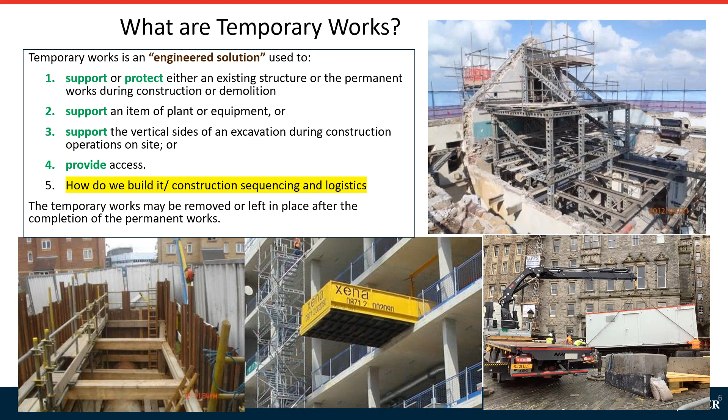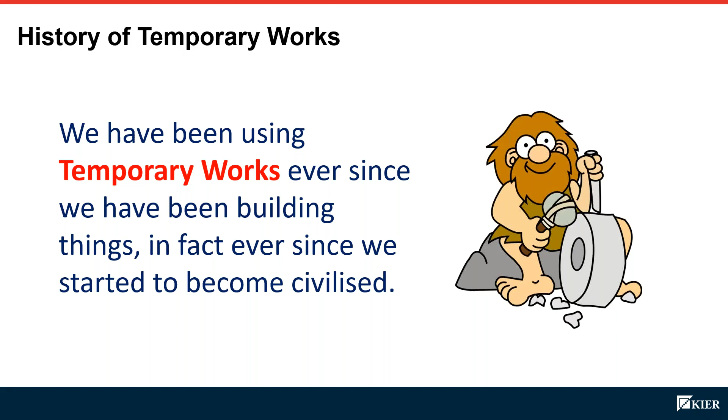And temporary works may be removed or left in place after the completion of the permanent works. So, like Ben said earlier, everything is temporary works when you think about it. And if we delve back in history, we'll see that we've been using temporary works since the dawn of time, ever since we became civilized. The ancient peoples were using it to move big chunks of stone about, so creating pyramids, or in this case, Stonehenge.

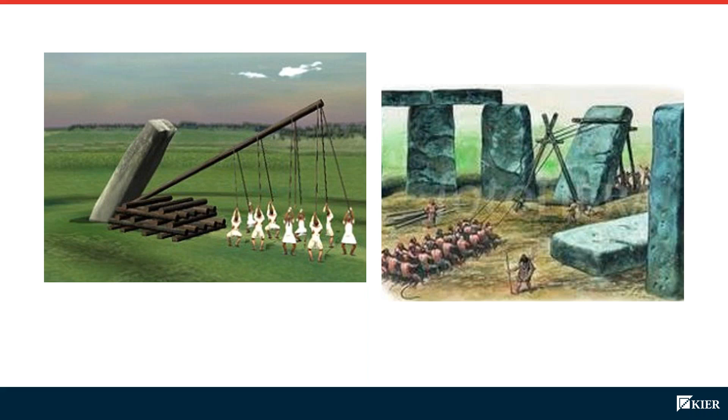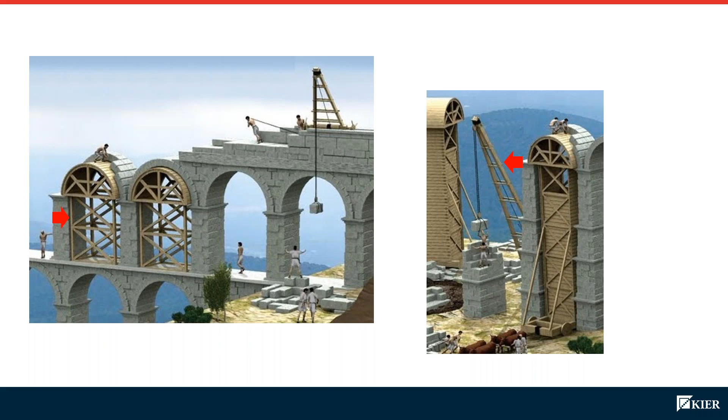The temporary works in this case would be the pulley system that we use to position stones. The ancient Romans were using them to build viaducts, and here you can see a sort of false work and a pulley system for moving blocks about.

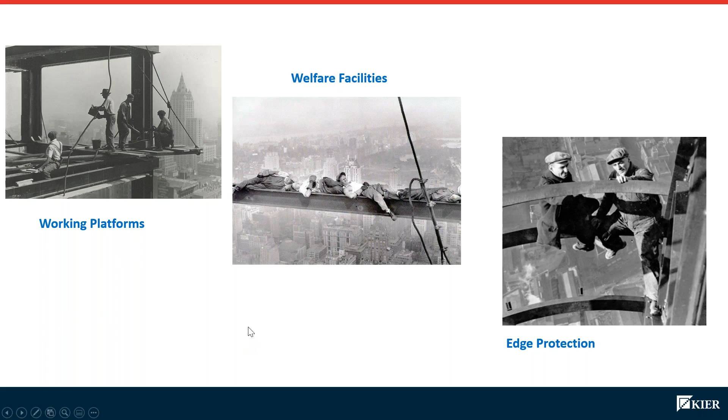They were using it in the Roaring Twenties when they were building skyscrapers, though looking at their working platforms doesn't quite look as safe as it is to modern standards. The welfare facilities definitely look a lot different. And was there even edge protection at that time?

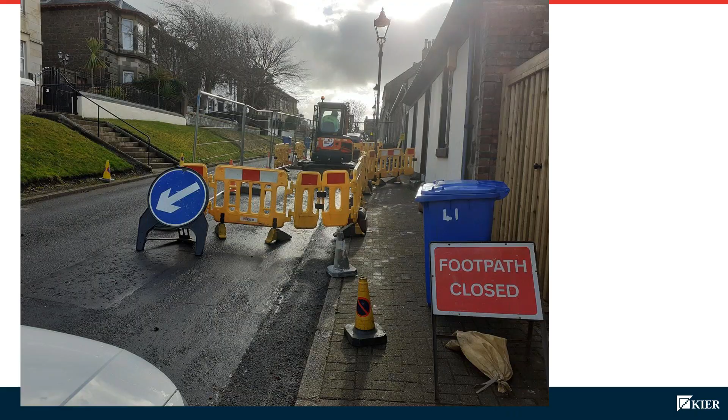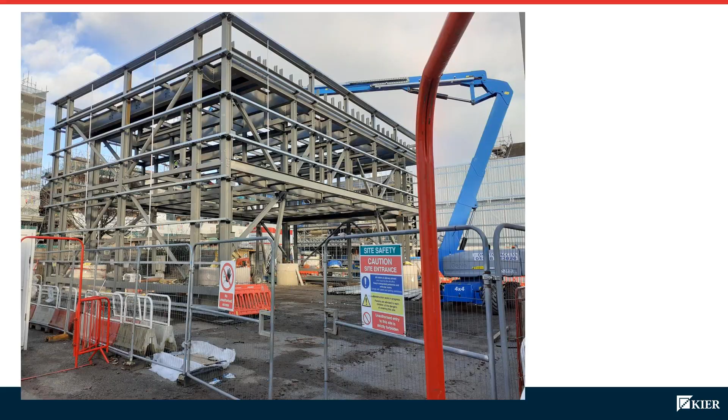Then if you look here, this was an example in Glasgow where this big steel structure was getting lifted onto the roof of a building, which is the Citizens Theatre in the middle of Glasgow. We've got a crane, and the three items for this lift that we need to consider is what's the crane sitting on?

Do we need mats or anything underneath it? How are we attaching the crane to the item we want to lift? And where are we landing it? Is it going to be stable when we move it and when we position it?

If you think about it, it's exactly the same as installing a site cabin in the middle of Edinburgh. So you've got your crane, which in this case is a HIAB. We have to check what it's sitting on. In this case, it's outrigger mats, which you can see at the bottom here.

How are we attaching it to the cabin? We've got some chains and we've got lifting eye points. And then where are we positioning it? We've got big concrete blocks because it's on a slope, which you can't really see in the photo. And we have to check that whole operation.

Now, if you consider risk profile, the picture before, I would say that is very obviously a very high risk item, especially if you notice there's a railway right next to it. Here, it's also quite risky because it's in an environment where there's a lot of public about - right next to where they're working is people going to the Edinburgh Fringe Festival, for example. So there's a different kind of risk we need to consider, which is members of the public.

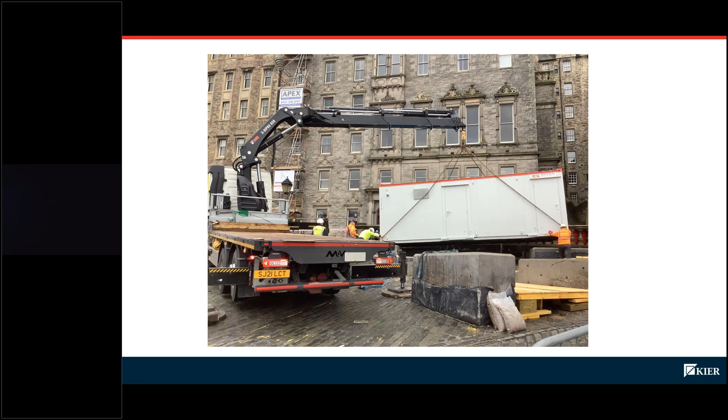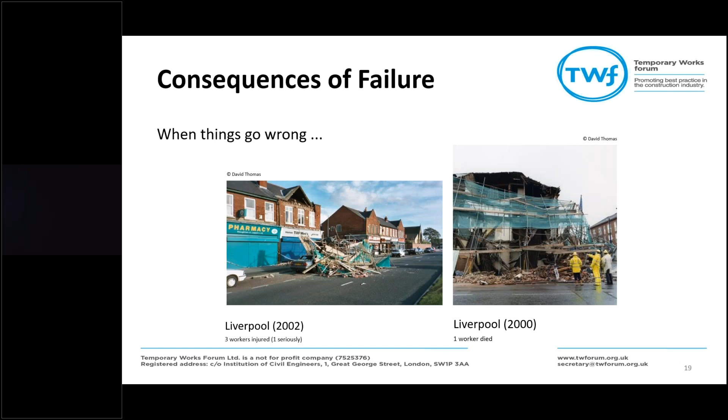So to control all of that, you've got the temporary works procedures and British standards. Back in the 1960s and 70s, there were a lot of incidents where they recognised formwork and falsework collapse, scaffolding collapse. So the government put together the Bragg report, which looked into what was causing all of this. It was published in the 70s, and it was realised that we need one conscious mind on site controlling temporary works - they created the concept of temporary works, which is what we mentioned earlier, and the need for something or a mechanism to control it.

They produced the Code of Practice for Temporary Works and Procedures and the Permissible Stress Design of Falsework. It started off as a false work guide, and now it's evolved over the years into the temporary works procedure, which all companies that I've worked for have based their temporary works procedure on.

The flow of this is that you identify what temporary works you've got on site, and for each temporary works item you create a design for it, you check that design, you control it on site using a permit to load and permit to unload system, and at the heart of it is someone called a Temporary Works Coordinator.

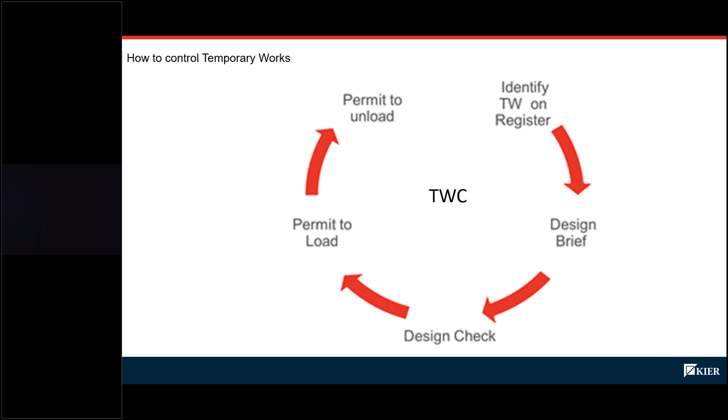So in each business, you have someone called a designated individual, and they are appointed to manage temporary works for your organisation. They're usually like a board director or someone high up who can affect policy and procedure in your company.

They have people called Temporary Works Supervisors, which are there to help support the Temporary Works Coordinator. They might be specialists in whatever temporary works item you're doing, so formwork specialist, scaffolding specialist for example, and they can look at what you're building and make sure it's built correctly as it's being constructed.

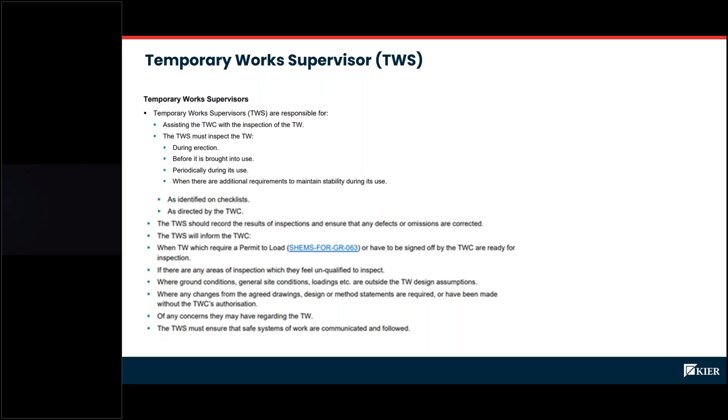And then we have Temporary Works Advisors, which is my role, and we go around carrying out audits to benchmark against our procedures. We develop and deliver training packs to our teams. We offer assistance and guidance and point people in the right direction on where to find things. And we also deliver CITB accredited Temporary Works Coordinator courses to deliver that training.

So some things to consider depending on what organisation you work for. If you're a client, you need to identify temporary works in your bid stages and encourage your designers to eliminate the need for temporary works where you can.

If you're a designer, a permanent works designer, identify and consider how on earth is my team going to build this, and try and eliminate the need for temporary works in the permanent works design.

And if you are a main contractor, a principal contractor, or a subcontractor, you need to look at temporary works at the bidding stage. Now, Ben mentioned just before we came on this call how in one of the tenders no one had actually looked at temporary works as part of it, and they hadn't budgeted for that, and that can lead to extra costs for the companies involved.

That can also lead to mistakes happening, or you carrying out the construction sequence in a way that is not as efficient as it could have been if you had considered temporary works earlier in the process.

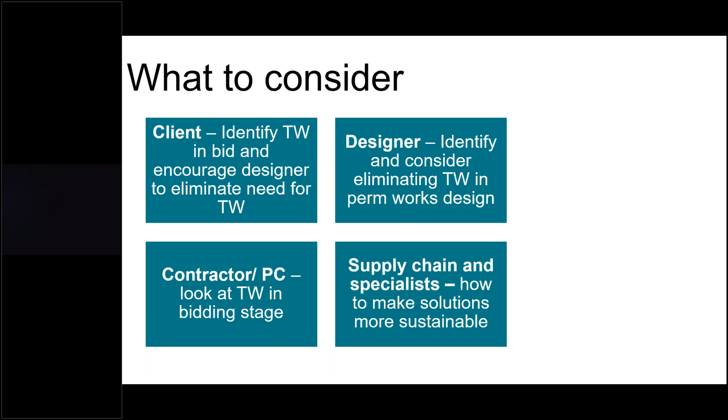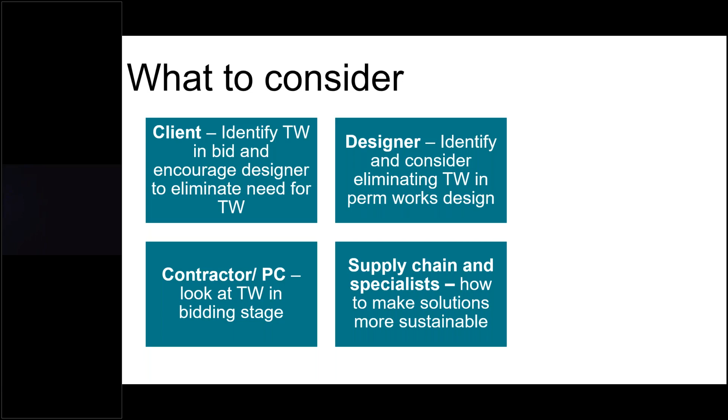And then if you're a supply chain or a specialist within the industry, your role is to make sure the solutions that you come up with fit in with what the contractors and the designers are doing, and to offer technical advice on how to carry out the temporary works that you're providing safely.

You start off with identifying what temporary works you need, appointing the temporary works coordinator. They assess the risk, record that risk, and then carry out designs and design checks and all the permit to work systems depending on what risk they deem the temporary works to be.

So a simplified version is that we identify the temporary works on a register. The temporary works coordinator pulls all the information together onto a design brief. They send that to the designer. The designer designs the item, they get it checked, they bring it back to the temporary works coordinator, they go, yep, that's the design and he did this, we're happy that's going to work, or it's not, and they ask more questions. It then goes to the construction teams.

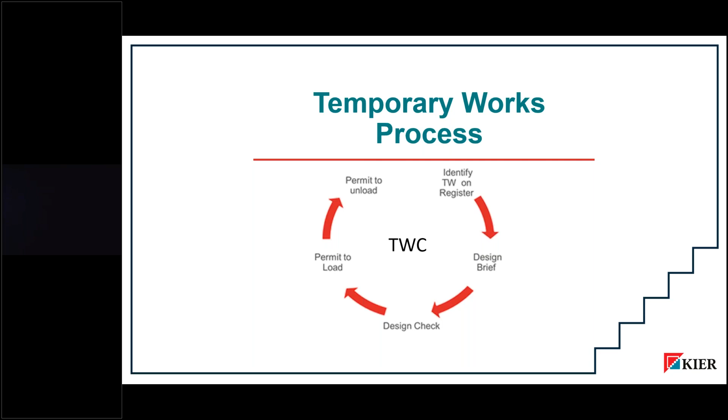When they're happy with it, they start building it, and they issue a permit to load to say that it's built as per the design, and they use the permit to load process as hold points of where we need to identify what's needed, or a check that needs to be carried out before you go into the next step of your temporary works sequence. So if we look at the first part, which is appointing a temporary works coordinator and identifying what temporary works you need.

So the best thing is that the Temporary Works Coordinator has the relevant experience and knowledge to carry out that temporary work. So if all they've been doing is putting up hoardings and they don't know anything about scaffolding, maybe they're not the right Temporary Works Coordinator to deal with a project full of scaffolding.

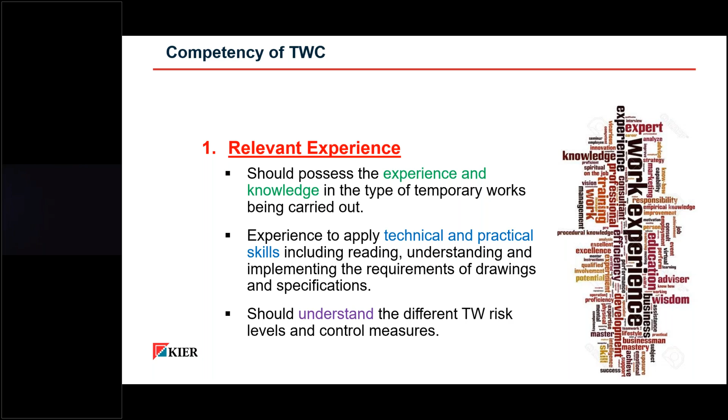Their experience needs to be technical and practical. So it'd be great if they were a chartered civil engineer, for example. In our system, if we've got a high risk project with 6 or more high risk activities, we would prefer a person to be a chartered civil engineer with the experience and knowledge to carry out that work.

If it's a building, for example, generally you don't get civil engineers working in buildings. It's usually a construction engineer or a construction management degree person who is a site manager or a project manager. So they're really expecting them to have extensive site experience and the suitable site experience of carrying out that work before.

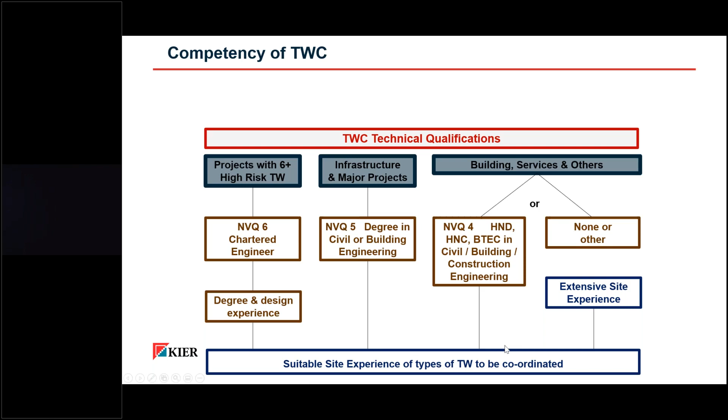The bare minimum requirement is that they've done a Temporary Works Coordinator course, so they understand the control process involved and their duties. It's not just a case of putting them on a course for 2 days and that's it, they're a Temporary Works Coordinator. They need to be mentored and looked after, because it's a lot of responsibility to become a Temporary Works Coordinator.

Not only are you responsible for programme and technical information, you're potentially responsible for the risk to site and people's health, the risk of damage to property, to people, and anything else involved with it. You are the controller of all the information, and if anything goes wrong, the first thing that the Health and Safety Executive or equivalent will look at is what did the Temporary Works Coordinator do to control this.

As mentioned earlier, the Temporary Works Register is the document we use to write down all the temporary works on site, to evaluate the risk profile - whether it's high, medium or low - and then use this document to track where we are along the construction or design process. You've got your design briefs, your drawings, your design check certificates, etc.

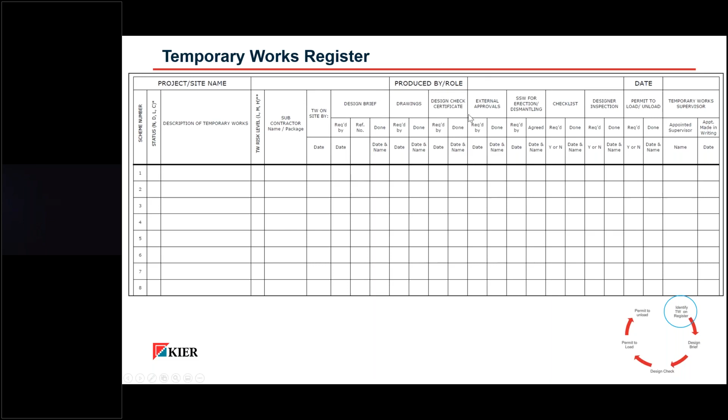So looking at the next bit, which is assessment of risk - since I'm speaking to the risk people, this is the bit you're probably most going to benefit from or know more about. Just like when you do a risk assessment method statement, you're assessing the risk profile of what you do.

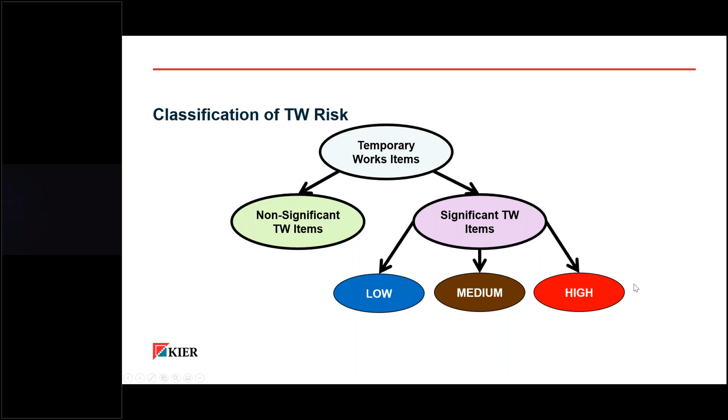In Temporary Works, it's just the same. You start off by asking: is it a non-significant Temporary Works item, or is it a significant Temporary Works item? If it's significant, it needs to be put on the register as low, medium, or high risk. Significant items of Temporary Works are those identified in Figure 1, which is some tables I'm going to show you. These list out the items - they're non-exhaustive, and items not identified may also be considered as part of that.

For non-significant items of Temporary Works, these are the ones that fall below the low risk category level. They have little or no design input. These items do not need to be included in the Temporary Works Control Register, as they may be subject to the same standards of safe working practices as other operations. So non-significant items may include aluminium mobile access towers erected to manufacturer's recommendations - the manufacturer has designed this, and we don't need to check that design as part of the process, we just need to know how to implement it correctly.

Ground level slab edge shutters that are 300 mil deep, and shallow excavations that are less than 600 mil deep.

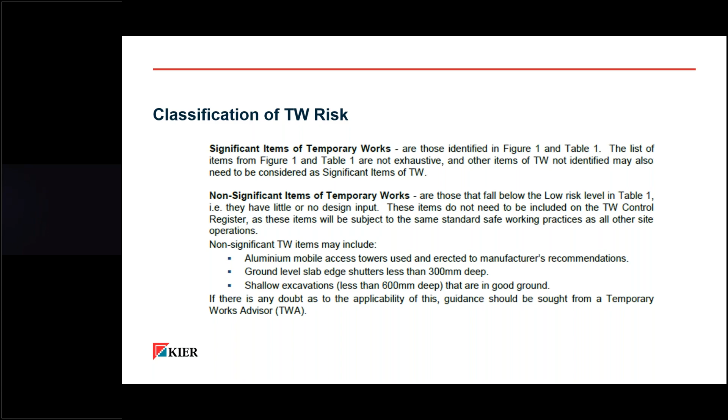Each organisation is going to have different categories of low, medium, and high risk, depending on the experience of the people working for them and the operational experience the organisation has. So you've got low, medium and high risk. The context also plays a great bearing on the risk category - what's low in one context might be high risk in another.

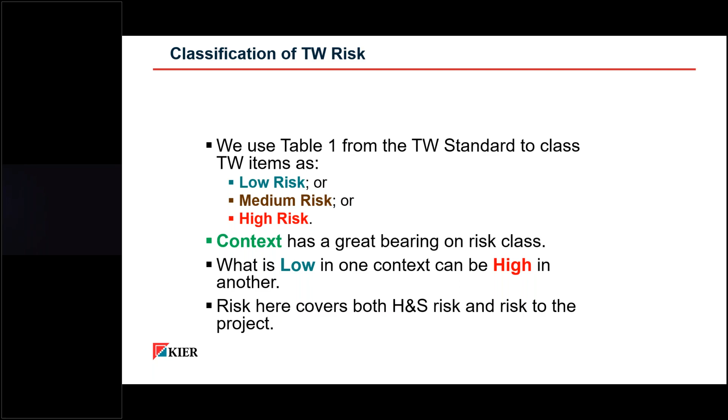Risks here cover both health and safety risk and risk to the project - it could be a financial risk, it could be risk to the public. So what's low in one context could be medium or high risk in another.

You'll need more barriers around it to stop enterprising members of the public, or nosy parkers, coming in and looking at things that could cause damage to themselves or others. There are other risks too, covering health and safety for the rest of the project.

So if you take that context again, that you're digging the hole but it's in the middle of a railway, first of all you need permission from the railway to dig the hole. You need to stop all the trains from running, and there are so many other things you need to do in that context which make it difficult. So again, that would be a higher risk event.

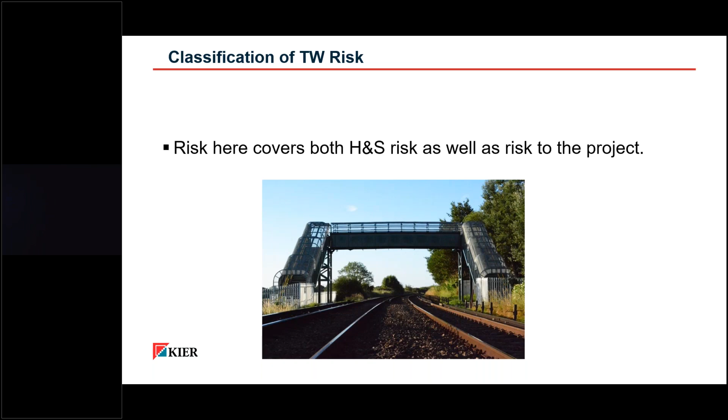So looking at the process, you would identify the temporary works item. In our case, we'd look at table 1 and say, okay, is it low, medium or high risk? Always remember that it's at the discretion of the Temporary Works Coordinator. One person might deem it to be a low risk item, but because of lack of familiarity with the project or the activity, a Temporary Works Coordinator may choose to make it higher risk than someone else who has been doing it for many years. So context of not only where it is, but who is dealing with it, is also a factor.

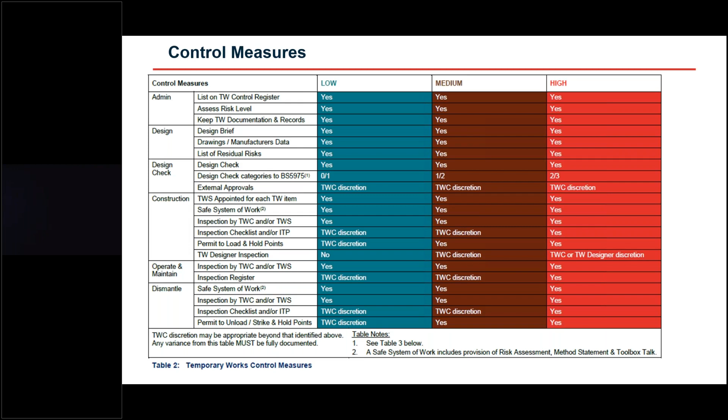So for the control measure register, you want to keep the temporary works on the temporary works coordinator's radar. The other saying is, if the temporary works coordinator doesn't know about it, it shouldn't be happening. The design brief is there to make sure the temporary works coordinator tells the designer what they want. Design information - you need enough of it so that the designer, who's never been to the site before, understands it. Design checks make sure it's been designed correctly. Safe systems of work are your risk assessment method statements. You've got inspections, and then you've got permit systems as well.

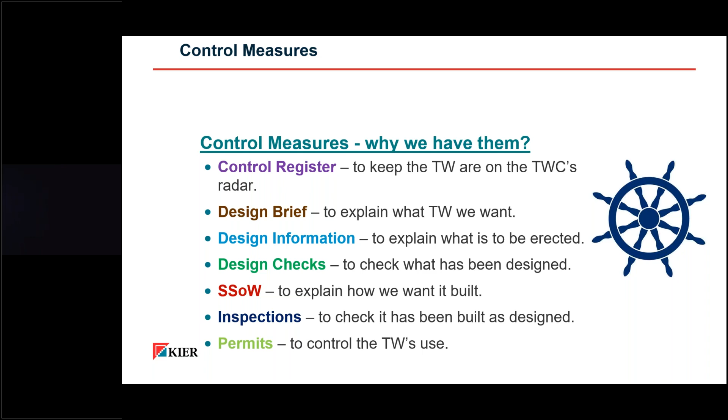And communication is a big key. So the temporary works coordinator is controlling this whole process, and it's good to think of them like a spider web. They should be in contact with everyone - subcontractors, clients, designers. They're really the heart of the project and should know what's going on at any one time, and if anything else is required. They should be the go-between for all these different people and departments.

So the next bit we're going to look at is preparing a design brief. The design brief is what tells the designer what you want to design. If you think about it, you've got your construction site in Glasgow, for example, but your designer is based in London - they've never been to Glasgow before and don't know anything about your project. So all the information they're going to get is on this piece of paper here.

You've got the project details, which is your standard - where is it, what do you want me to do? The scope and description is, okay, I need you to do X, Y, Z. The preferred solution is, well, I've got some of this material on site and it'd be really handy if you could incorporate that into the design without me having to buy any more.

Special considerations - so that's, oh by the way, we're digging a hole but it's right next to a railway and there's a chance we could undermine the track. The designer needs to know all this, or as part of the design check submission, you have to submit it to Network Rail so they can approve it. Reference documents - any drawings, sketches, any scaffold designs, anything you are putting in, you need to tell them in here.

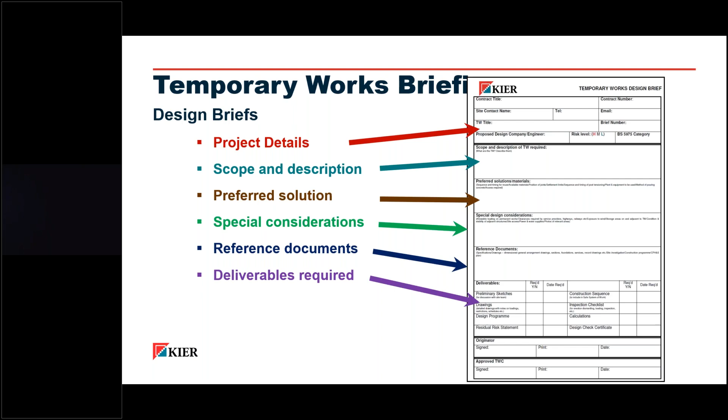So what do we need from you? We need a drawing, it needs to be on next Tuesday. We need a residual risk statement, which is a risk assessment. We need some calculations because we're going to show these to Network Rail to say that we're happy with it. And then we need a design check certificate that you can sign to say that you've designed it correctly and that someone's checked it. So all that information goes to the designers.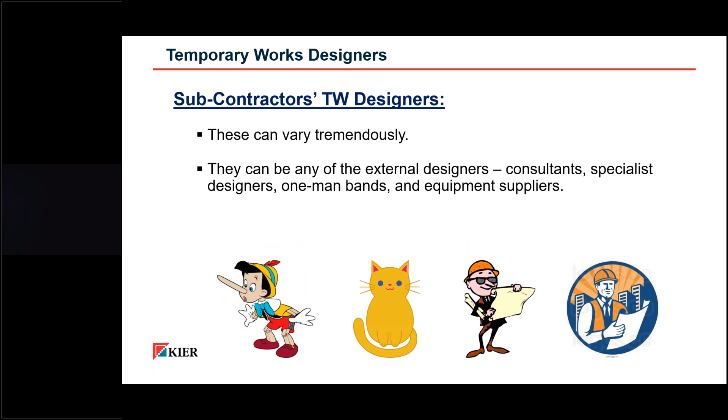Now, it could be your own in-house Temporary Works designers - so in Kier, they're called Kier Professional Services. We're based mostly in England and close to Wales. There could be a Temporary Works supplier - the people you can see here. There could be a subcontractor's Temporary Works designer in-house, or it could be a specialist Temporary Works designer - some are based here as well. Or it could be a Temporary Works designer who's separate to the activity and is doing like a third-party check, for example.

So the Temporary Works design happens. Things to consider is that the design is based on what is included in the design brief, so if you don't put it in the design brief, the designer isn't going to know you want it. There needs to be adequate information. There's no point just having a one-liner saying, can you design me a scaffold? If you don't tell me where the scaffold's going, how big it needs to be, what you're putting on the scaffold, or any hazards that are in the way, I can't design you a scaffold.

Think about loadings, what effects on structures it could have, anything it's going to interfere with. For example, my scaffold is going to be tied onto a building, but it's a school, so we need to provide access into the school. So we're going to be installing it at night, so we're going to use big lamps and it might be difficult to see.

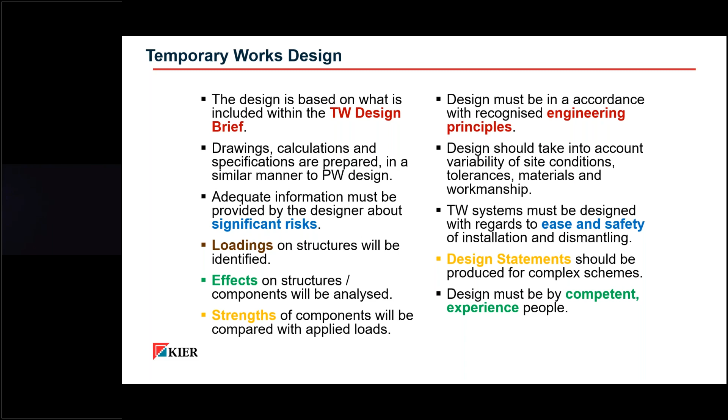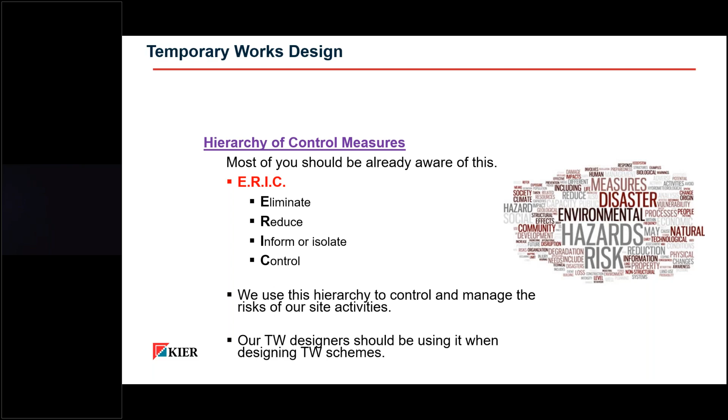Now, have you all heard of ERIC, which is eliminate, reduce, inform, or isolate and control, which is a hierarchy of control measures. So if you can eliminate the risk, that's great, don't do the thing. You reduce it by providing something that's going to reduce the risk to the person. Inform is, okay, this is the bit we can't design out, this is still going to be an issue, you're going to have to do something about it. And control is, we're going to put a barrier around it so no one gets near it.

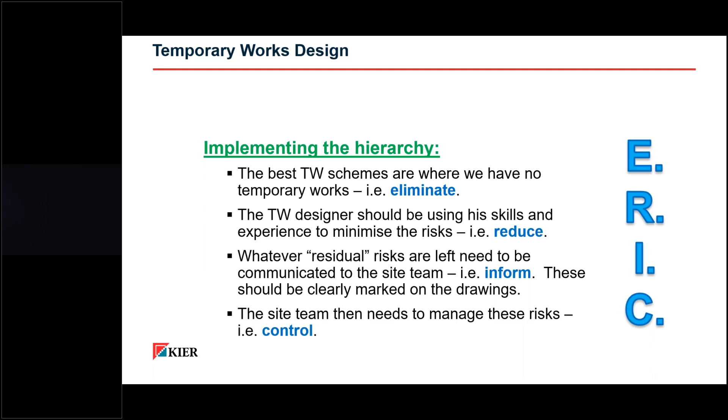And the best Temporary Works schemes are those that eliminate the need for Temporary Works. For example, if you're installing a building and you need to prop one of the floor levels, or you had the option of modifying that floor that you didn't need to prop it, it's probably better that you don't install the props, you don't design it that needs props.

So the flow of risk is the Temporary Works coordinator at the start has identified the need for temporary works and the risks associated with it. They have told the designer about the temporary works item and the risks associated with it and the design brief. The designer has tried to remove as much risk as they can. They then go back to the temporary works coordinator and say, this is what we've done, but there's still risk A, B, C because we can't design it out.

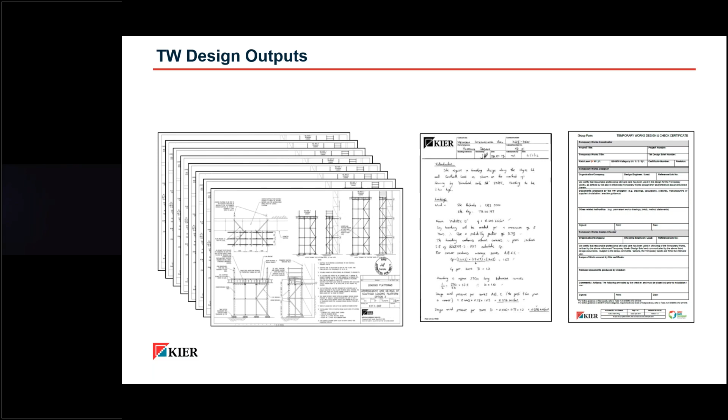Then it gets reviewed, and it is usually reviewed by another designer. What they're looking for is adequacy of the design. Is it compliant with the design brief? And is it going to work? Is the concept going to work? What British standards have they used, do all the numbers add up?

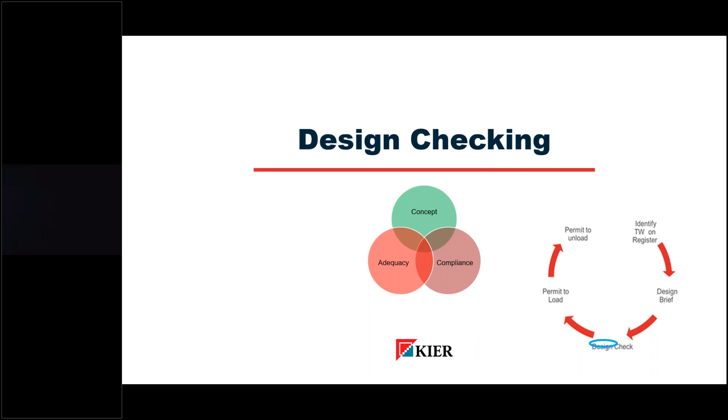So the Temporary Works design and check certificate looks a bit like this - this is what we receive back. And the design check is an evaluation of the design to determine whether it conforms with the design brief and can be expected to provide a safe engineered solution.

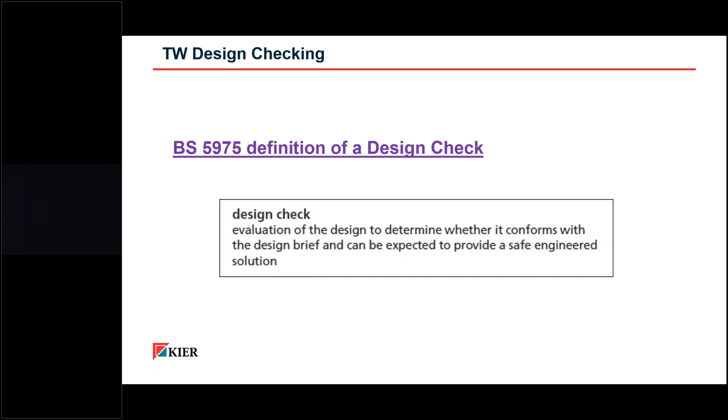So like earlier, we mentioned that temporary works can be high, medium or low risk. Design check categories are to do with how complex it is to design something.

For things that are not that complex to design, it might be a Cat 0, a standard solution checked by another member of the site team. Like earlier we mentioned using a Haki staircase system or an aluminium tower staircase system, where it's a pre-engineered solution someone else has designed, and you're using an off-the-shelf product. You want to make sure it works in the situation you're using it in, so the person next to you checks that you've picked the right one out of the catalogue.

A Cat 1 check is for a simple design where you need to put some numbers to it. It might be a hoarding design, for example, where you've done a wind check calculation. This would go to a designer, and then the designer sitting next to them would check it.

A Cat 2 is for a more complex design where you might need to put more numbers to it, or it's a bit more tricky. They'll send it to someone else who's never seen that design before, usually in another office or team, and they'll start looking at it from scratch. They'll do their own calculations and then check whether they match the calculations the first person produced.

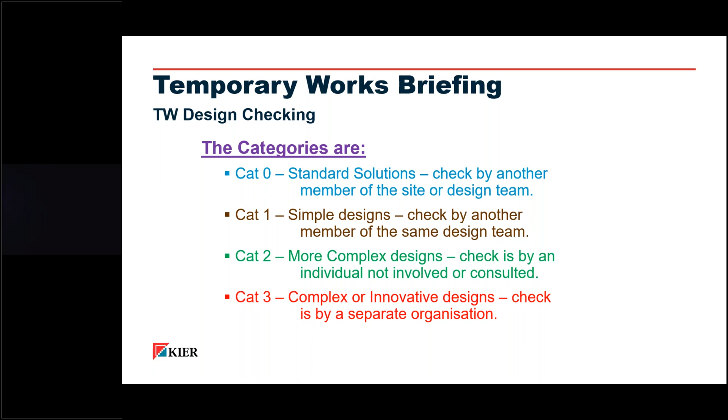Then Cat 3 is when it's a more complex or innovative design, maybe something you've never designed before, and it's checked by a separate organisation. Instead of getting the calculations through, you just get the drawing to say this is what we're going to do, and it's up to that Cat 3 checker to come up with their own calculations to see if they reach the same conclusion. This is the extract from BS 5975 that shows that.

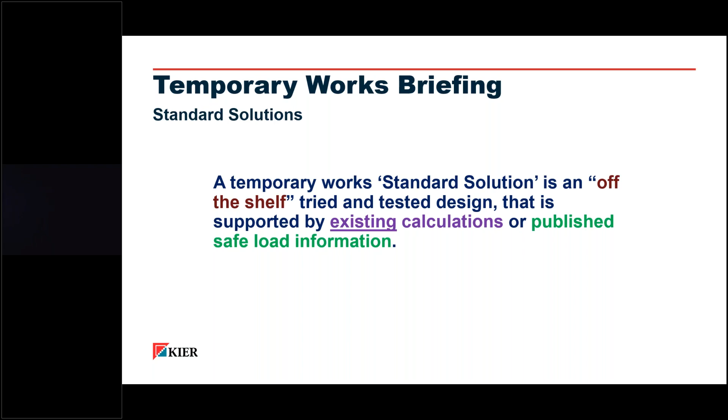Standard solutions are another thing to think about - that's your Cat 0s. A temporary works standard solution is an off-the-shelf, tried and tested design supported by existing calculations or published safe loading information. Usually these are aluminium towers or staircases, fence panels, silo base foundations, or trench boxes.

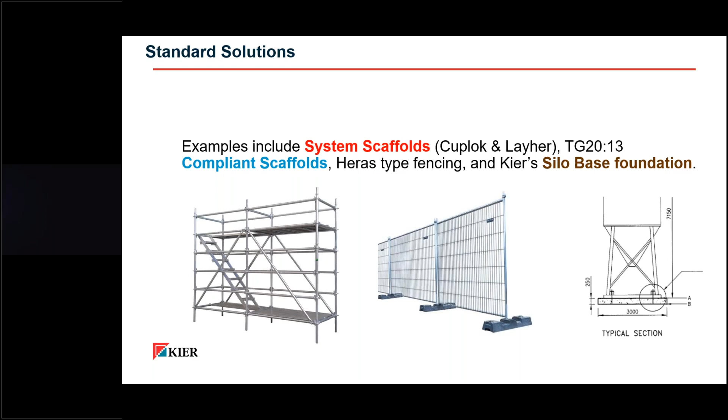The thing to be cautious about is that the person who picks the solution becomes the designer. Under CDM or equivalent, they are responsible for ensuring the solution will work. So you might pick an MGF or Groundforce trench box to use, but MGF and Groundforce will have a clause in their catalogue saying it's the person who picks and chooses to use it who becomes the designer, responsible for checking it can be used in the situation they propose. Same with props and same with outrigger feet.

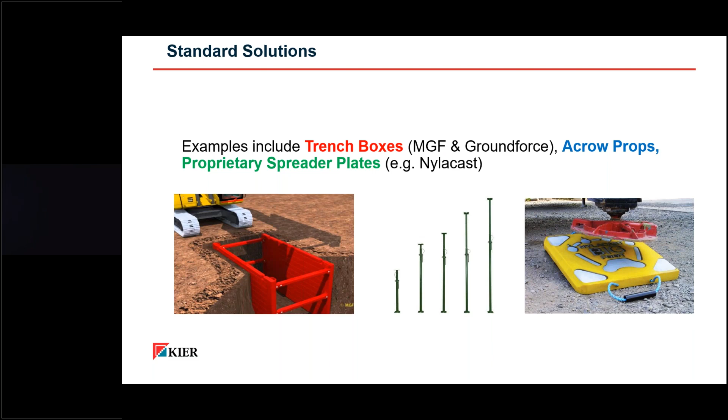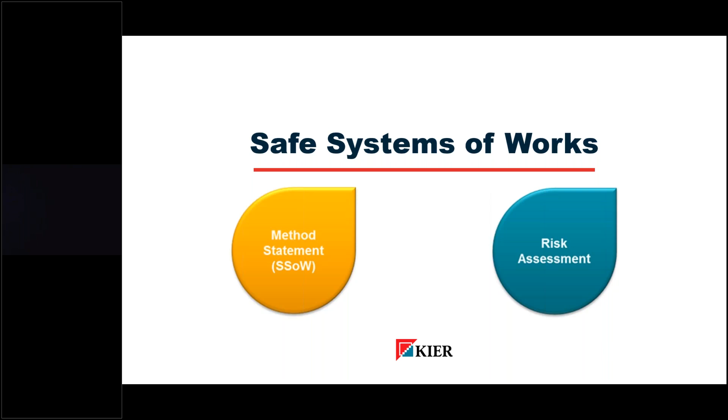The next bit we're going to look at is preparing the safe system of work and having the temporary work supervisors check it. The safe system of work is basically your risk assessment and method statement, making sure your design and any risks identified by your designer are controlled as part of that. The person who looks after that on site is called the temporary work supervisor. It's their job to support the temporary works coordinator, be their eyes and ears, and look at the item being built, checking it matches the drawing, matches the safe system of work, and is installed correctly.

Similar to temporary works coordinators, temporary work supervisors have to be appointed and have the right competency, having been on the Temporary Work Supervisor training course. They need the right experience in what they're doing, but don't necessarily have to be a chartered civil engineer - it could be a scaffolder if they're looking after scaffolding, for example. Sometimes the temporary work supervisors are not within your organisation - they could be the foreman from the scaffold company that installed the scaffold for you.

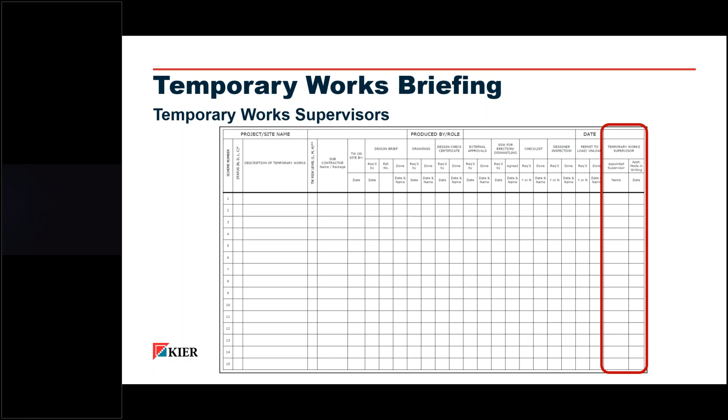But the one thing is they need to have been on the training course. So for each item of temporary works, you write down who's the supervisor in charge of it, and every time you get new information, you update the temporary works register to keep track of this. Some of the more complex sites I've worked on have had 50 to 100 temporary works items, so it can take a bit, and sometimes be a full-time job just to manage temporary works on a project.

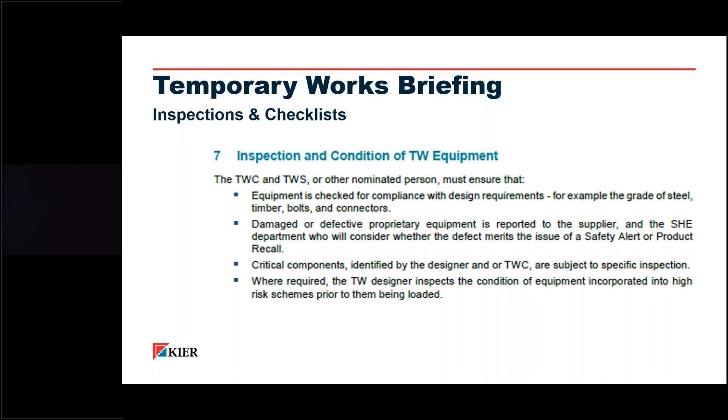Inspection and checklists. This is where, as part of the process, you're checking things on your site. It could be the equipment, it could be checking for damage or defects, critical components, all that kind of stuff.

And if there are any changes before you start building something - for example, the wrong crane showed up. Instead of being a 100-ton crane, they've given you a 200-ton crane, and your outrigger loadings are different, you need to change it. You need to go back to the designer and say, look, this change happened.

So why do we have to manage that change? Well, it could become costly. If something went wrong and you're the person that implemented that change and it's not gone as per the design, you take on the designer's responsibilities, and it could be you that goes up against prosecution if something goes wrong. Also, people could get hurt.

In a nutshell, a temporary works coordinator should refer all significant changes back to the temporary works designer, not be afraid to stop the work whilst the issues are sorted out, and instruct the erection team to change the temporary works to match drawings, unless there's some very good reason not to.

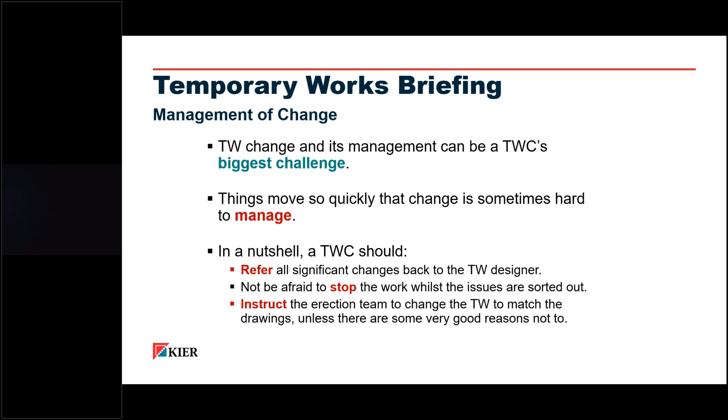And if there's a very good reason, stop what you're doing, discuss it, record what changes are being made, check it with the designer, and confirm it's okay to proceed, because that small change could actually be a structural weakness and could cause failure later on in the process.

So the next bit is about carrying out and what records you need to keep, and how we control things is on with permits.

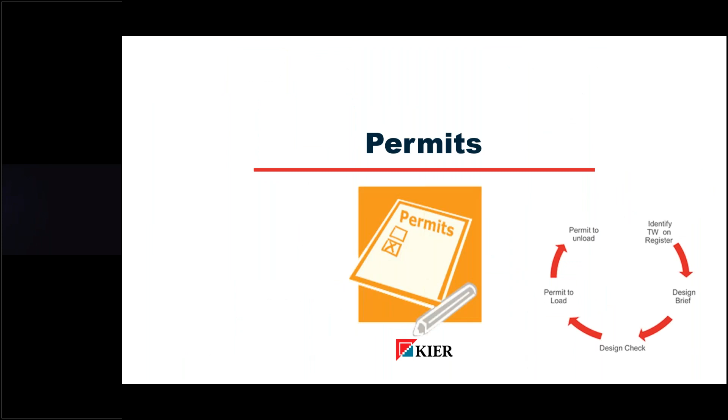So your permits to load and unload, this is basically hold points. So if you're installing a scaffold, you do one for the foundations, that they've been installed correctly and that you're going to load them. Then you do one for the anchors, and you do one for the actual scaffold itself. And then you do a permit to strike or unload to say that at each level we can proceed on to the next one.

Think of it similar to a hot works permit or a permit to enter a confined space. The reason it's there is to notify someone of a hazard or a condition that needs to be met in order to proceed to the next step.

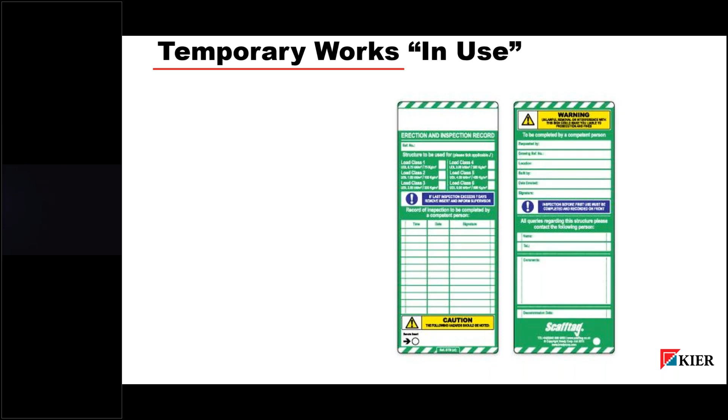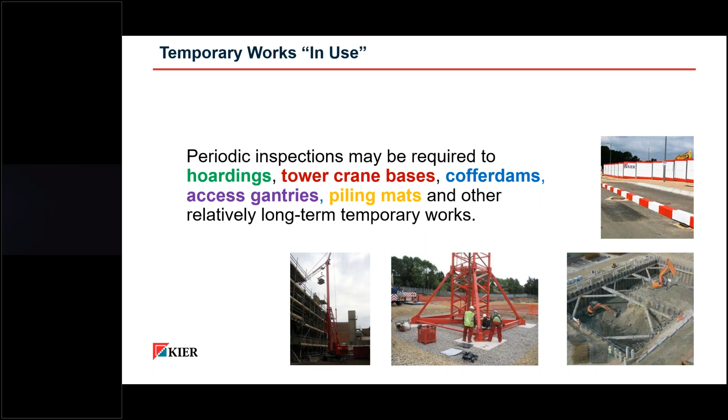And they can use visual aids on site, like this scaffold erection and inspection record, which shows what's been going on. And for temporary works in use, periodic inspections may be required for hoardings, tower crane bases, cofferdams, access gantries, piling mats, scaffolding, and any other relatively long-term temporary works item.

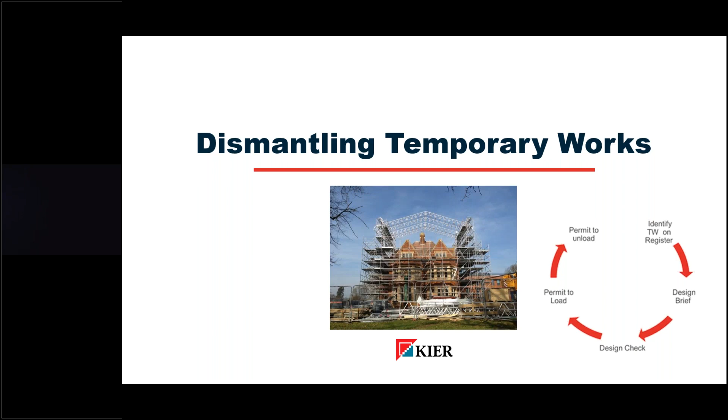So the next bit is, once you've used your temporary works, how do you dismantle it in a safe manner? Don't forget, the key stage in the life of a piece of temporary works is when you're removing it. You have to make sure there's no chance of collapse, and agree on your dismantling sequence. That's maybe something you need to consider when you're installing it.

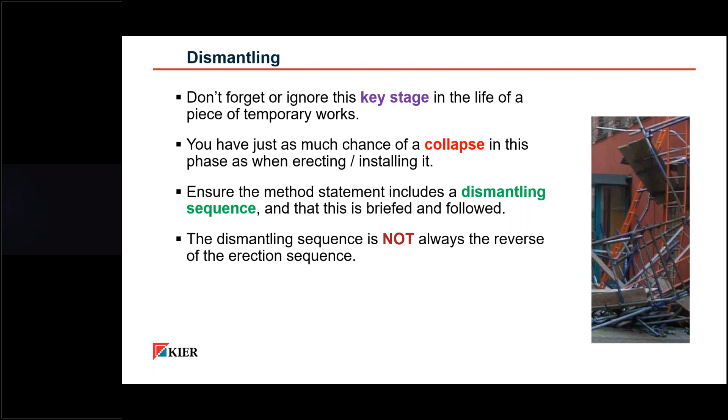So you've installed a scaffold and then you built something around the scaffold, and you now find it difficult to remove that scaffold. The dismantling sequence is not always the reverse of erection.

And records - it's important to keep all records so that you can learn from them, and then if you have any audits, you can cover them. So, a worked example.

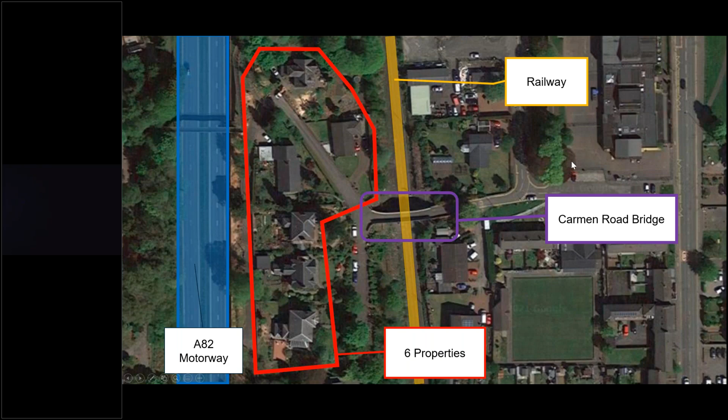To give you a bit of context, Carmen Road Bridge is the only vehicle access over a railway to Carmen Road, where 6 properties were on an island between the A82 motorway and a railway. So if we removed this bridge, they would not have access to the properties - they'd either be stuck in the properties or stuck outside.

What we found was that during Network Rail's inspections, they discovered that the bridge was starting to deteriorate in strength, so they put in some temporary props - which support or protect either an existing structure or the permanent works during the construction or demolition sequence. This was done for safety reasons, and they instructed BAM to come up with a solution on how to install this bridge. We were only given 2 weekend possessions - so 2 54-hour periods - to be able to do this work when the railway was shut.

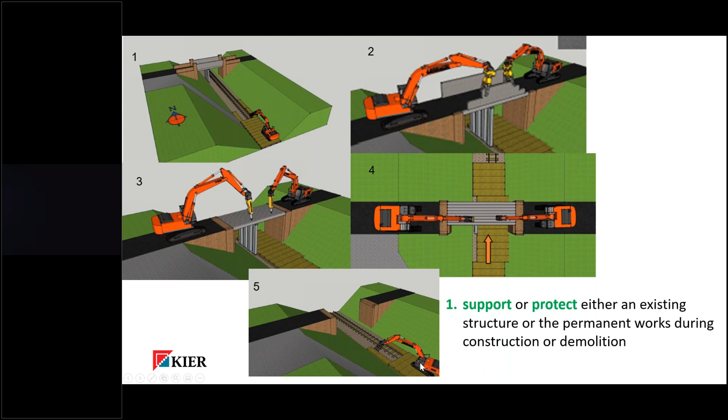So as part of the Temp Works checks for this, I had to support and protect either an existing structure or the permanent works during the construction demolition. I had to look at the sequence of how we demolish the existing bridge deck and then replace it. This shows the sequencing we looked at - at what point we could take out the props supporting the bridge deck, and at what point and how we were going to protect the railway underneath it.

Another thing I had to look at is because we're using excavators right next to the edge of the abutment face, would that cause overloading? So that was another temporary works item - support and protect the structure.

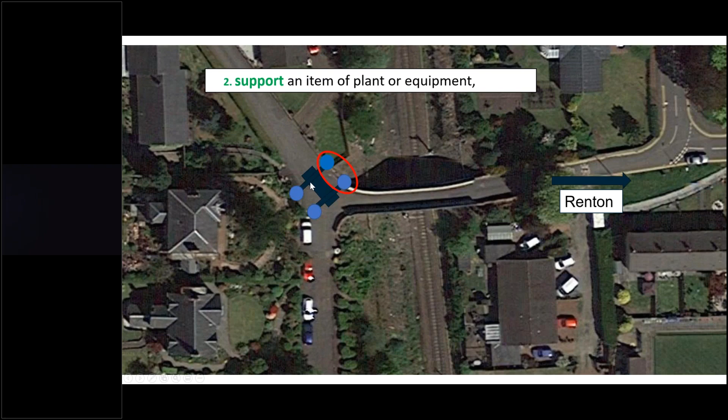Another thing I had to consider was once we demolished the bridge, how do we install the new bridge sections. I had to look at using a crane. I identified that the only place to put the crane didn't have enough space to install it, so we had to go by railway instead. We used a Kirow crane, which is a rail-mounted crane, to lift the new bridge pieces.

We had to find a new lay-down area to bring the pieces along on the railway. So this is where the 'how do we build it', the construction sequence and logistics, and temporary works checks were carried out.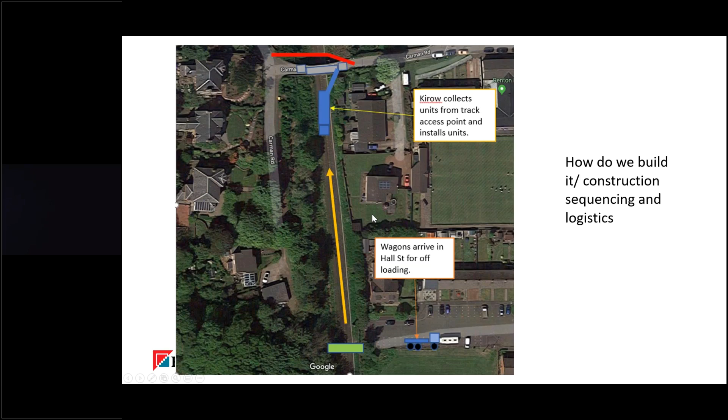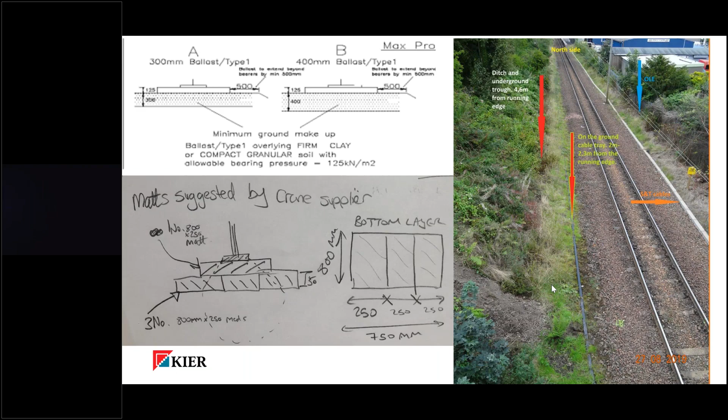For the Kirow rail-mounted crane, I had to consider where it would be sitting when lifting. If you look at the right-hand photo, you've got the railway there, a soft verge and some cables. It would have outrigger mats to help spread the load, so would these clash with that? I had to do some sketches, and this is information I sent to designers to check what clashes were in the way, as part of my design brief.

The other thing I had to consider technically is the track support zone. This is where you've got your track, you come out 1 metre and down a 45-degree angle, and all the bits in red and yellow support the track - that's all the ground underneath it. If we dig into this area or put a load on top of it, like an outrigger, that could disturb it and interfere, causing the track to warp.

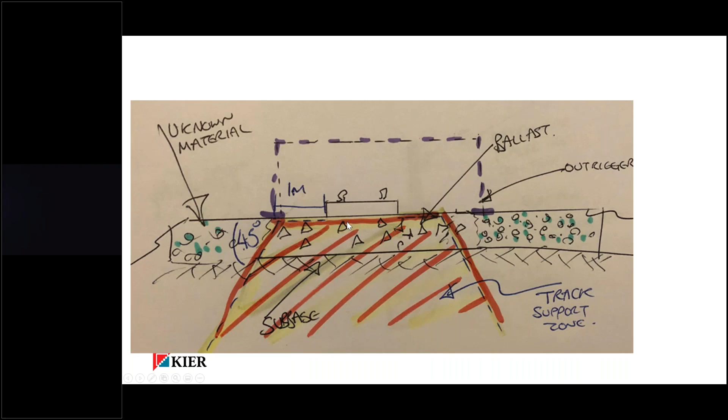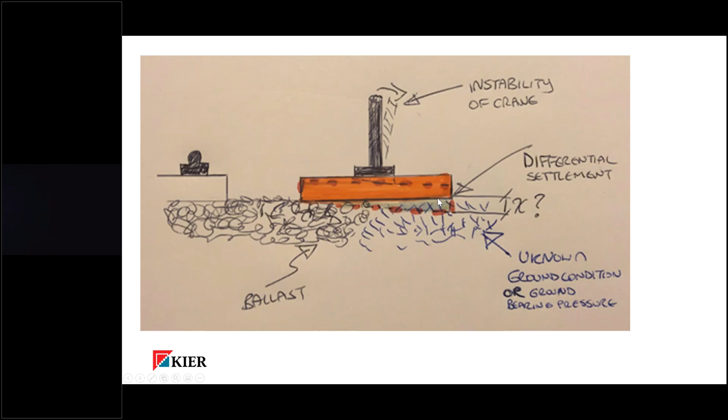So we had to consider where we're putting the outrigger mats. Also, you've got the ballast, which is heavily engineered to 125 kilonewtons per metre squared load, and then you've got this grass area. Was there a potential that half the mat would overturn or sink into the ground? That was another thing I had to consider, and again that's all raising the risk profile.

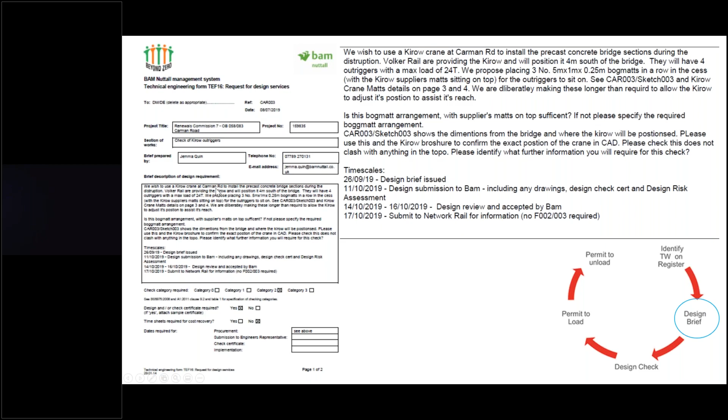Here are some sketches trying to show where we could put the mats, and this is the design brief that I sent. Note that it talks about what timescales were needed and some safety concerns, and I also attached these mats, and this is what we came up with. It looked very similar to what I proposed, but the designer came back with some considerations, for example some testing we had to do to check the ground could take the mat loading.

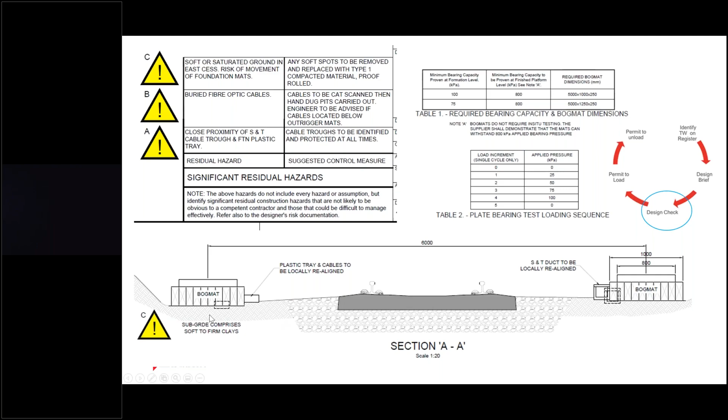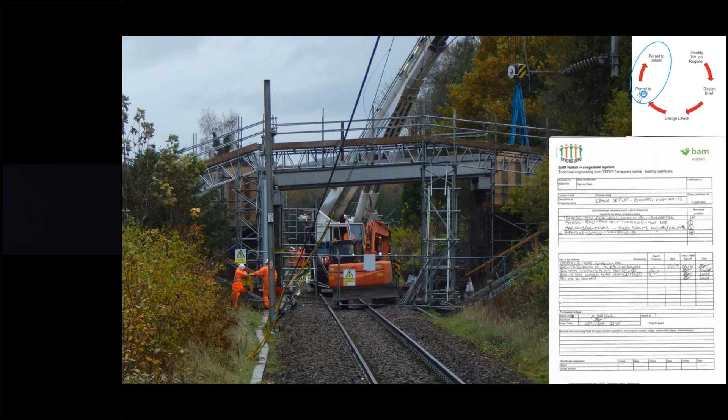Here's a photo now of them carrying out the work - that's the Kirow crane lifting in the components. I don't think you can make out the outriggers because they're on the other side of the bridge, but this is what the bridge looked like. I controlled all that activity by issuing a permit to load for the ground, to confirm that when we set up the mats, they were in the right position and weren't going to clash with anything as per the design. And this is what the bridge looked like when we finished.

So the next bit now is where can you get help after this?

Our aim is to be the focal point of temporary works knowledge, create debate, raise competence, and promote research in temporary works.

We carry out four meetings a year, streamed online. We have resource libraries with lots of technical information sheets - I have just helped produce one on outrigger mats, funnily enough. We also have access to an online web chat where people can talk about temporary works and ask each other advice and questions.

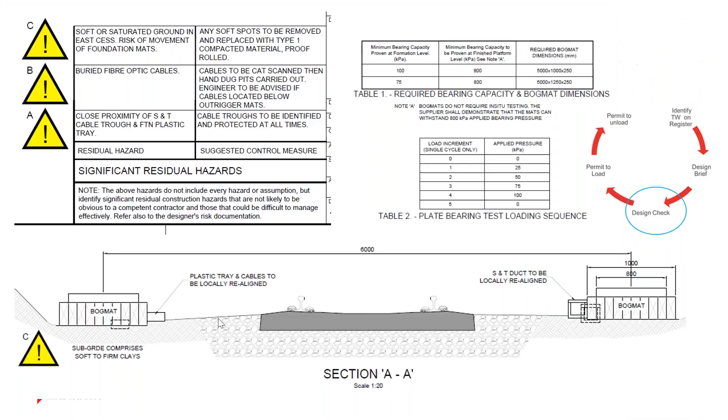Some of them you may have answered as the presentation went on, but I'll throw them out there. John asked that BS 5975 includes Table 1, which has a very low risk class and states that they may not need to be added to the Temporary Works register or need a design brief, and can just be managed by RAMS and inspection. Have you examples of these scenarios, as it can sometimes get confusing what is not added to the register? So if we go back to the page with restricted categories, not design check.

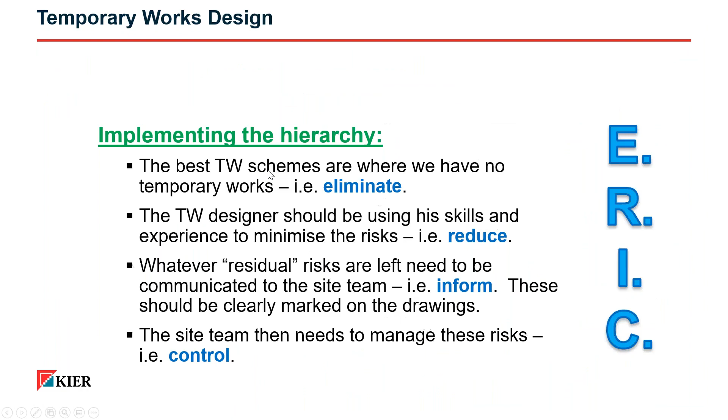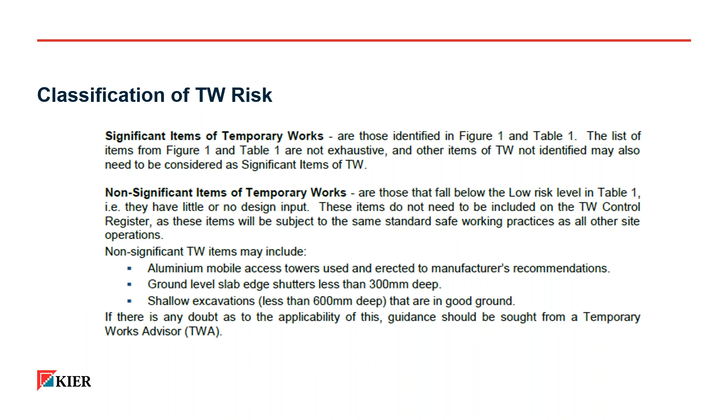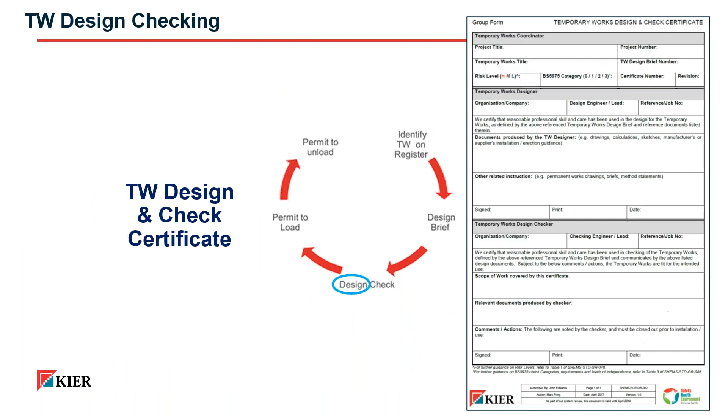So non-significant items are those that fall below the low risk, so they have no design input. We did have a picture of these ones. So depending on who you speak to, I would class anything from a ladder to small barriers, maybe like we call them Chapter 8 barriers, they're like crowd barriers, not quite fence panels. Things like that, which you wouldn't need to design, you would just simply install. Or a small MEWP that doesn't need outrigger support that you're using on a base slab or where you're confident the ground can take its weight.

Yeah, sometimes it is a little bit grey. It's hard because the same cherry picker depends on the scenario, depends on where it is, what it's doing. It's contextual - very contextual - and it's all well and good till something goes wrong. But we don't have to design everything to an inch of its life. If there's a good manual, good supplier and manufacturer's information has been used as per that, I think a lot of that will tick a lot of boxes for me. It's only when you start getting more high risk, or you're starting to go off that initial design, that I'd start worrying about it.

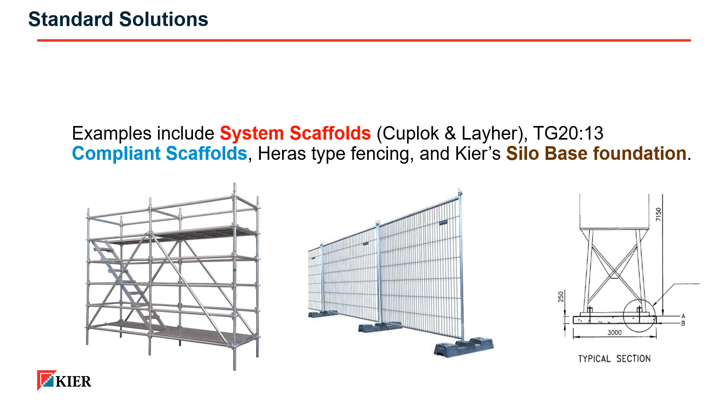That's it, that's all the questions we have. The presentation was that good - everyone understands temporary works from top to bottom now. Or did they fall asleep? No, I said it's a huge subject. It's put a lot of context in for me and where everything stands. But obviously, if you're involved in these things day to day, you need more. I cannot recommend highly enough to everyone that's on the Temporary Works Forum - as I said, it is our go-to for information when we're scratching our head.